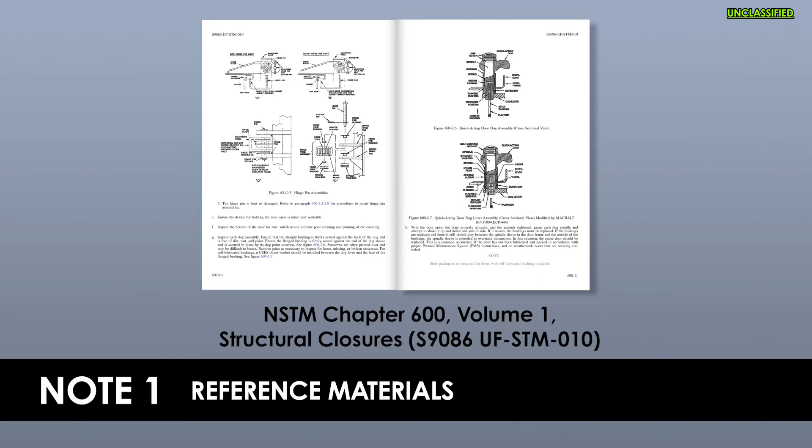S9086-UF-STM-010 contains detailed steps, illustrations, and procedures for accomplishing inspection and maintenance on watertight doors. It shall be used in conjunction with this MRC. Warning signs can be manufactured locally of engraved red-white plastic to provide information shown in Figure 1 shown on this MRC. Warning: exercise extreme caution when working around an open trunk.

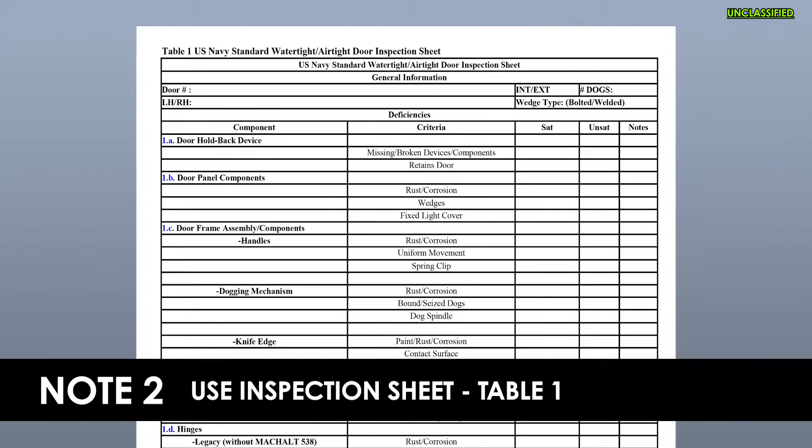Make inspection record sheet using Table 1 as a reference. Rope off and secure area around both sides of door with safety lines and hang warning signs. Verify proper installation operation of safety chains or guard ropes. Inspect for missing shackles, snap hooks, bolts or toggle pins with retaining lanyard, if applicable.

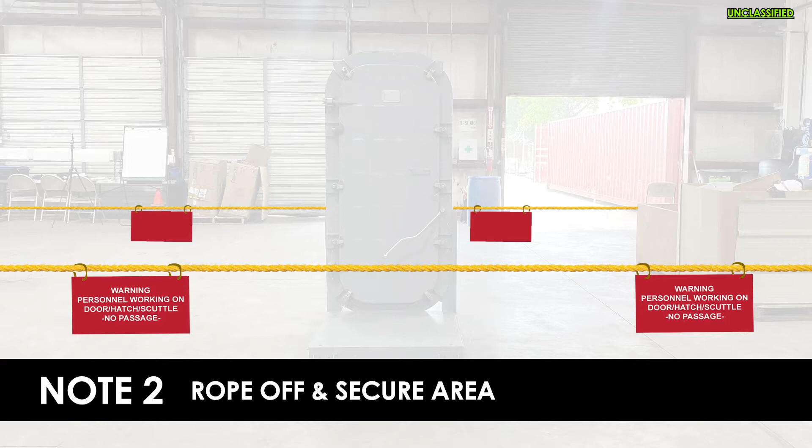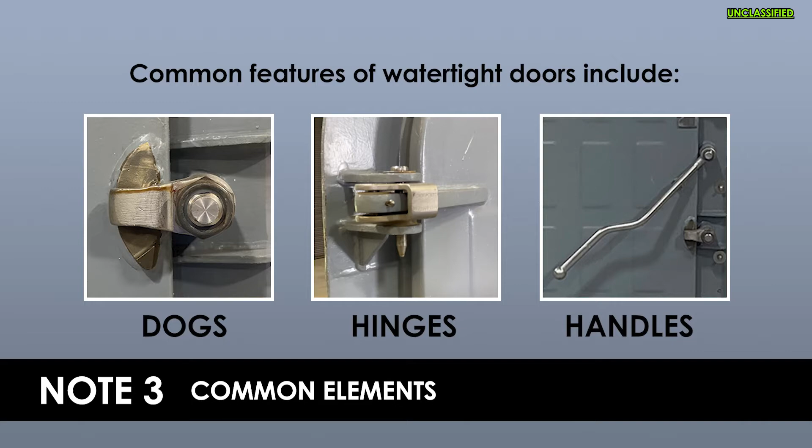Complete this maintenance requirement MR in its entirety prior to reporting discrepancies to Work Center Supervisor. Common features of watertight doors include dogs, hinges, handles. Use inspection record sheet to annotate all inspection results. Open door. Inspect door panel components. Verify no rust or corrosion on panel surface or components.

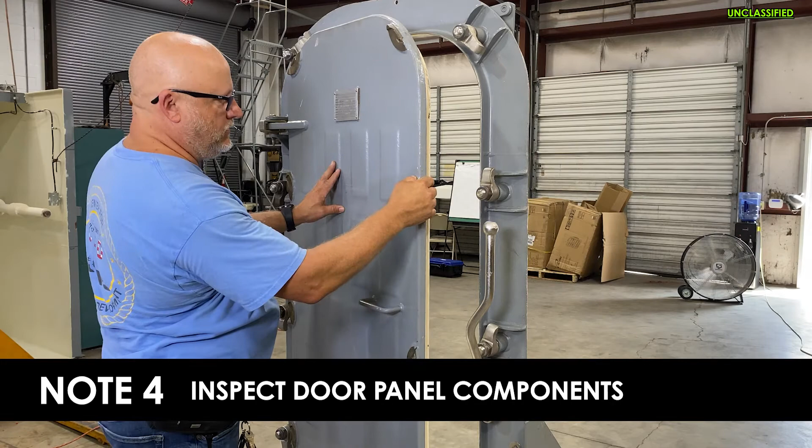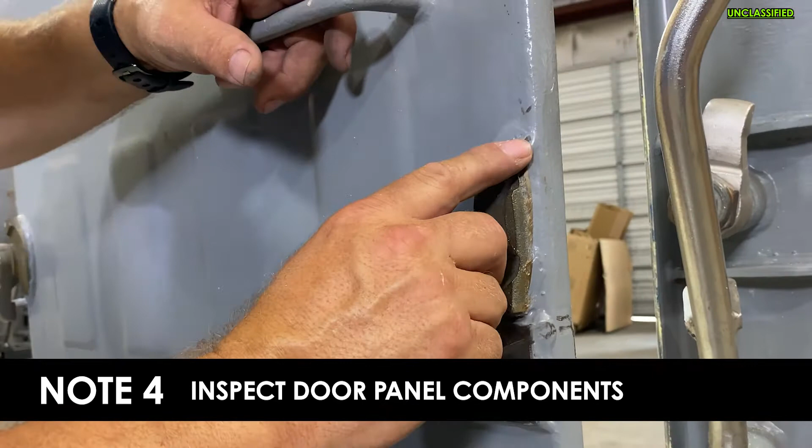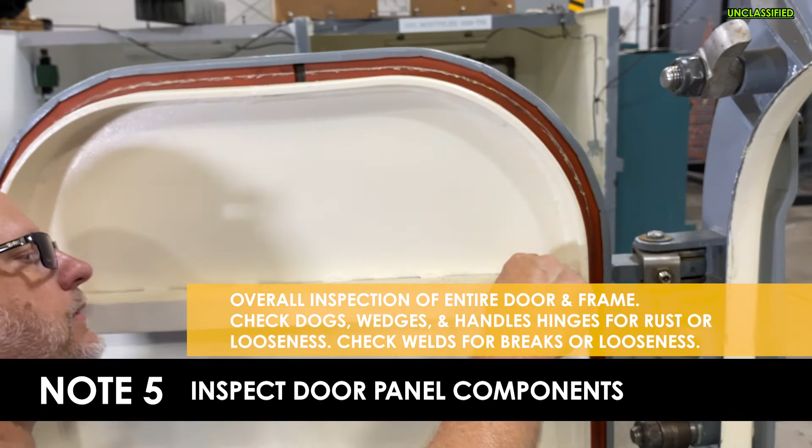Inspect welded mechanically fastened dog wedges for wear and gouges. Wear or gouges that exceed 1/8 inch in center of wedge, or leading edges that measure less than 1/16 inch, are unsatisfactory. Inspect door frame assembly components. Inspect overall door framework. Check dogs, wedges, handles, hinges for rust, looseness and corrosion. Also check all welds and connections for rust, looseness and corrosion.

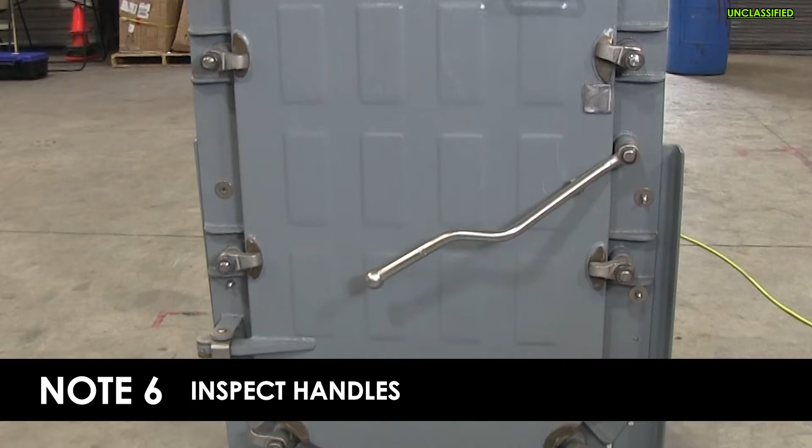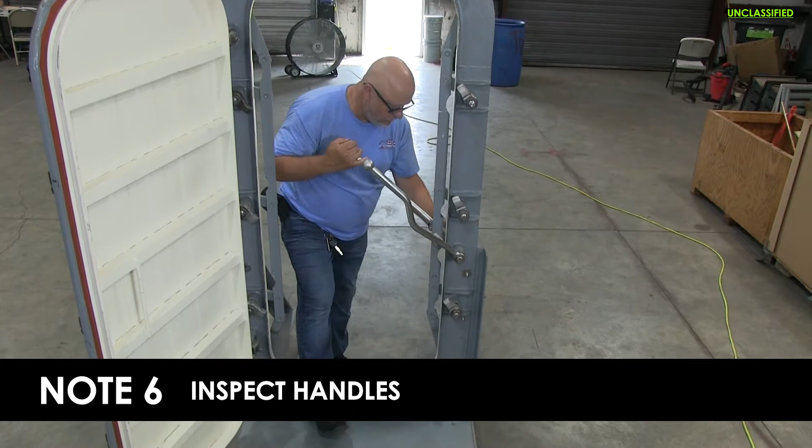Handles. Quick acting and individually dogged. Inspect handles for rust corrosion. Rusted corroded handles are unsatisfactory. Step 1C1B applies to quick-acting doors only. Operate handles. Verify internal and external handle move in unison for quick-acting doors only. Omit if not applicable. Failure of door handles to move in unison are unsatisfactory.

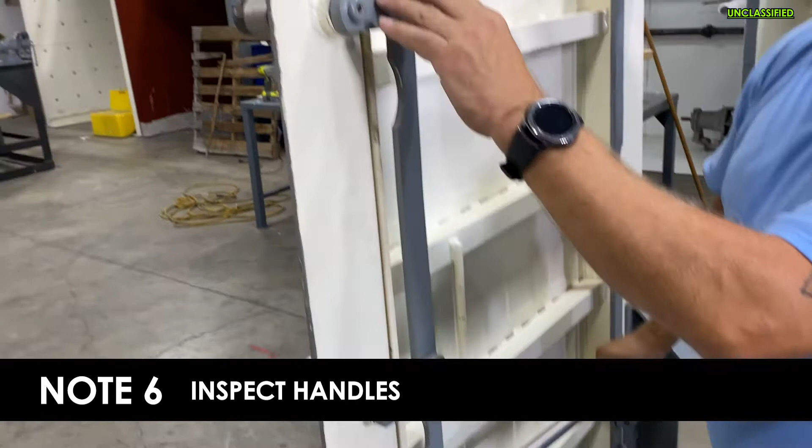Inspect handle spring clip assembly for broken or missing spring clip brackets, spring clips, or bolts. Broken or missing spring clip brackets, spring clips, or bolts are unsatisfactory. Engage handles into spring clip and verify spring clip holds handle firmly. Looseness of handle in spring clip is unsatisfactory.

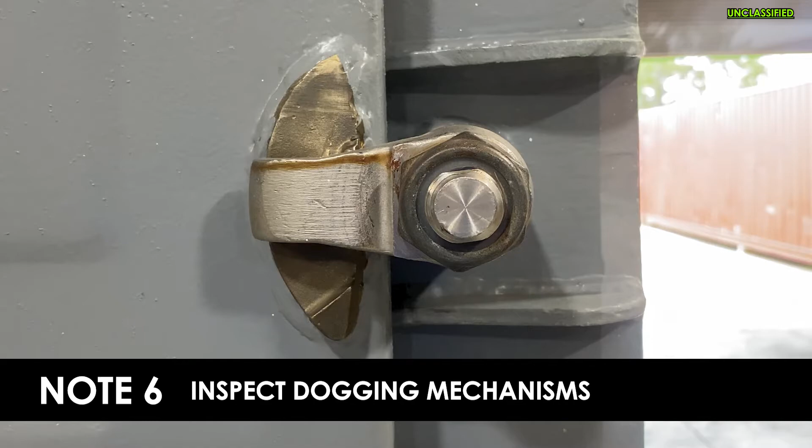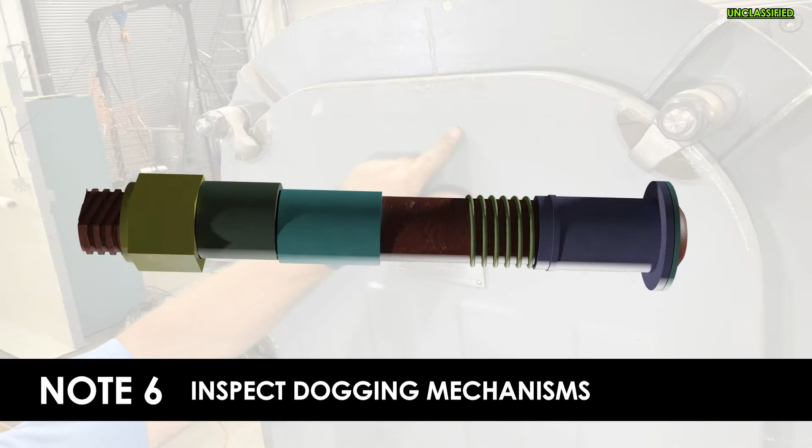Dogging mechanisms. Quick acting and individually dogged. Verify no rust or corrosion on dogs or dogging mechanisms. Inspect dog spindle set screws. Missing set screws, or set screws not flush recessed with surface of spindle sleeve are unsatisfactory. Inspect dog spindle self-locking nuts jam nuts. Missing or loose self-locking nuts jam nuts are unsatisfactory.

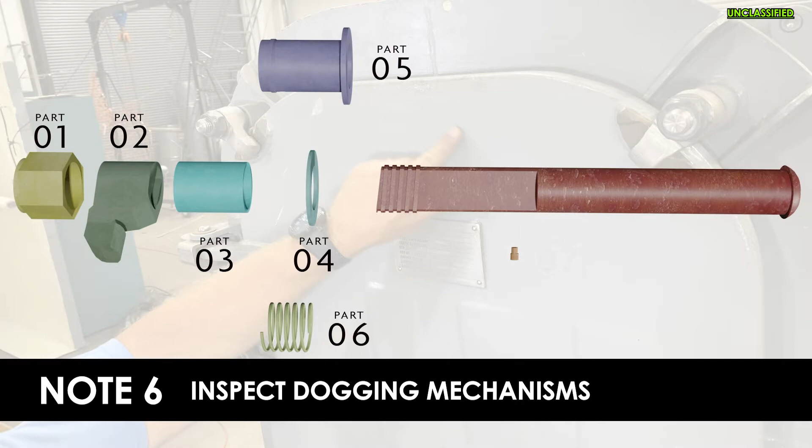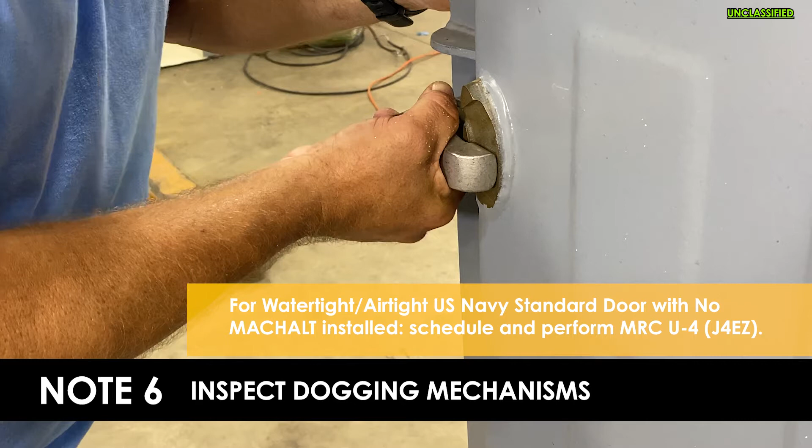Push on face of dogs. Binding or no movement of dogs is unsatisfactory. If unsatisfactory: for watertight airtight with no MACHALT installed, schedule and perform MRC U 4J4EZ. For watertight airtight doors with MACHALT 167-31010-526 installed, schedule and perform MRC U 5J4FA. For all other configurations, notify Work Center Supervisor upon completion of MRC in accordance with Step 1J.

Inspect for worn dog spindle bushings and operating handle spindle bushings. Grasp each spindle and attempt to shake it up and down and side to side. If movement occurs, then bushings or sleeves are worn and considered unsatisfactory.

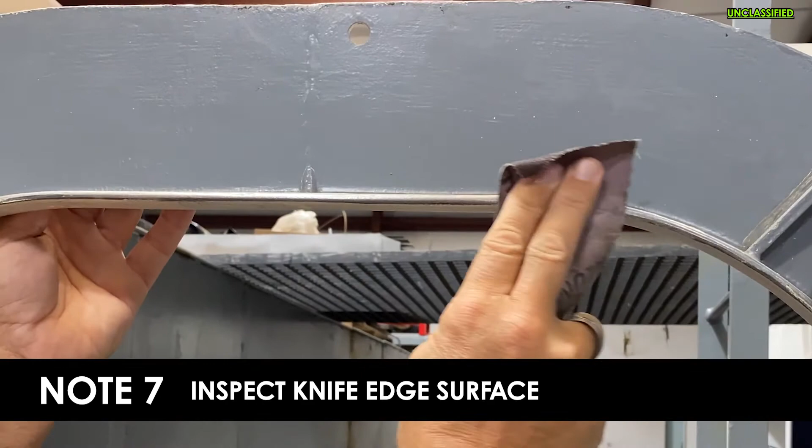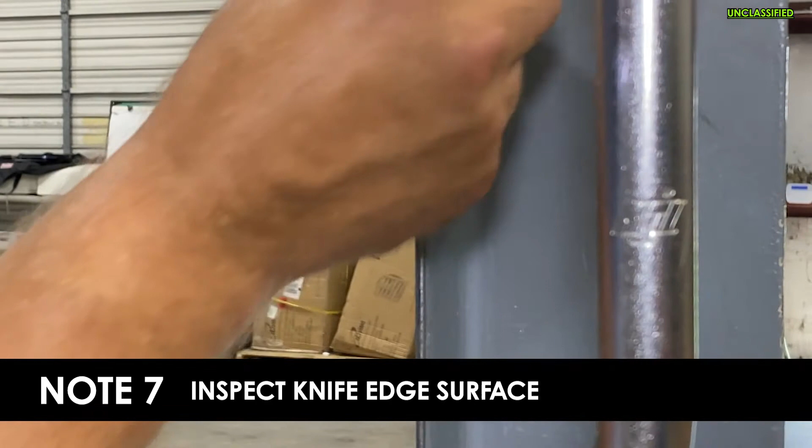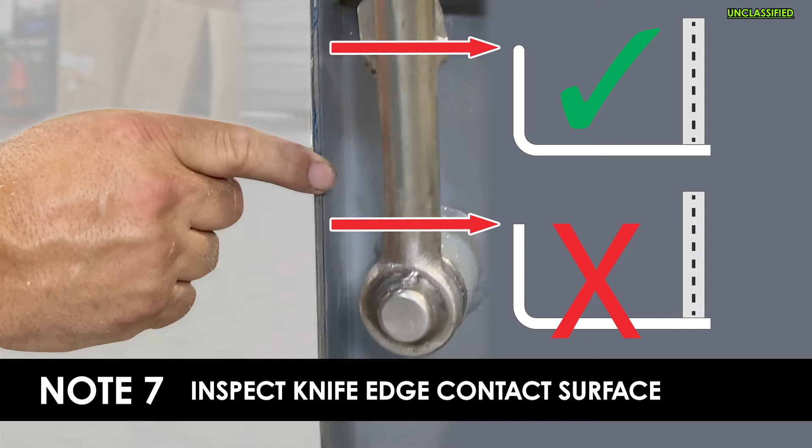Knife edge. For removal of paint from knife edge surface, utilize cloth, abrasive, 320 grit, SPMIG item 03176. Verify no paint on knife edge contact surface and/or no rust or corrosion on knife edge and knife edge contact surface. Inspect knife edge contact surface for roundness. A flat knife edge contact surface is unsatisfactory. Inspect knife edge for nicks and gouges. Nicks or gouges in excess of 1/16 inch are unsatisfactory.

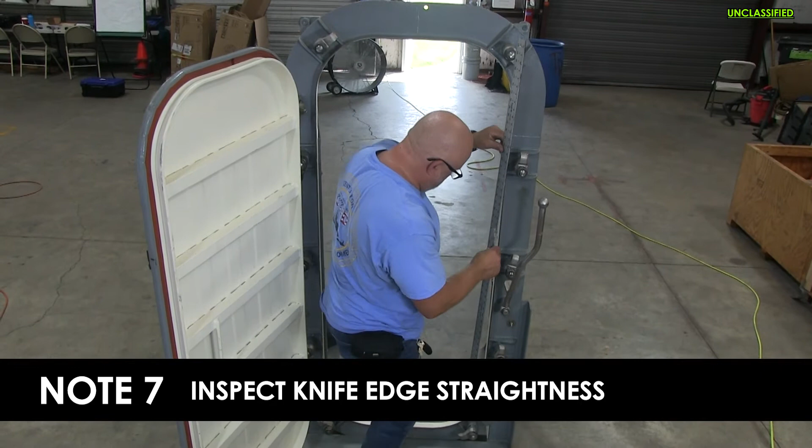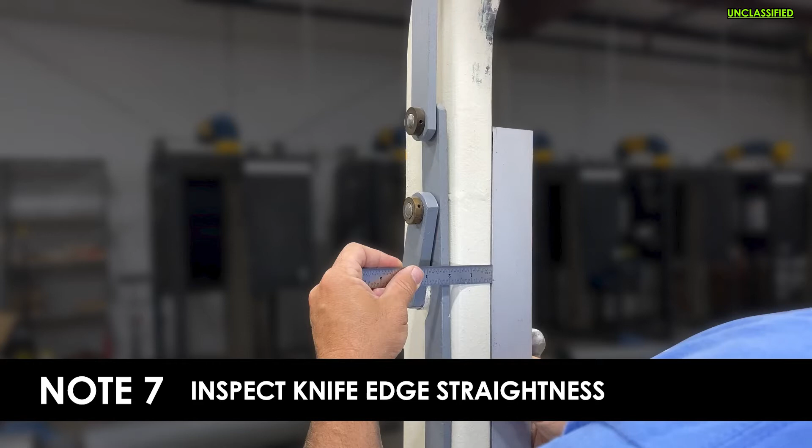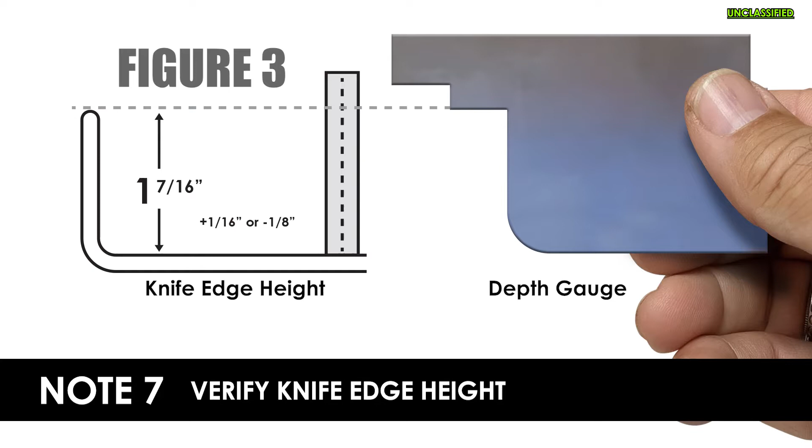Inspect knife edge for straightness as follows. Place a carpenter square parallel to knife edge face. Utilizing feeler gauge, measure gap between rule and knife edge. Gaps in excess of 0.0625, or 1/16 inch, are unsatisfactory. Repeat step for remaining knife edge surface. Verify knife edge height is 1 7/16 inch, plus 1/16 inch, or minus 1/8 inch, as applicable. See Figure 3 on MRC. Knife edge height not within tolerance is unsatisfactory.

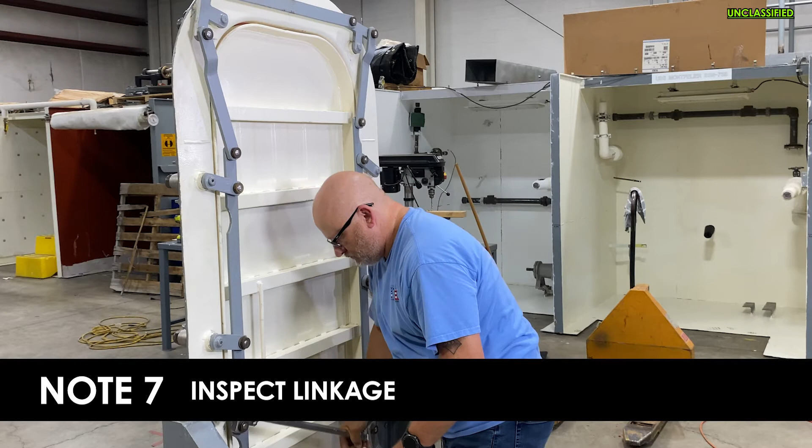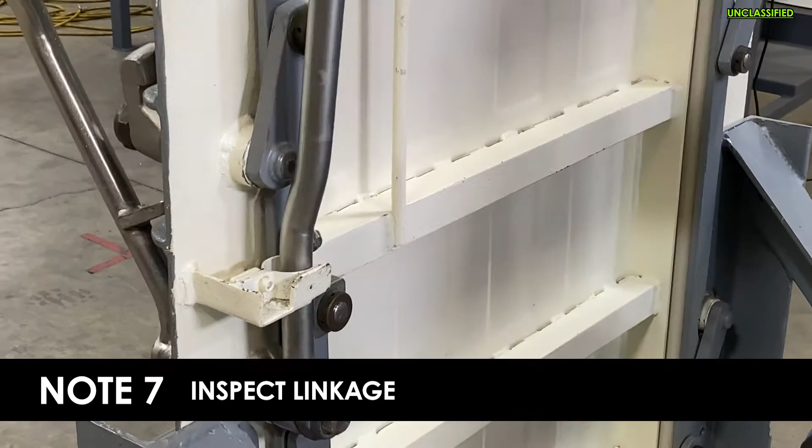Linkage for quick-acting doors only. Verify no paint or rust or corrosion on linkage. Inspect conrod lever or linkage for looseness by operating handle up and down to move dogging linkage. If looseness of dogging linkage is obvious, inspect conrod collars, thrust washers, linkage bushings, and cotter pins. Any missing components are unsatisfactory.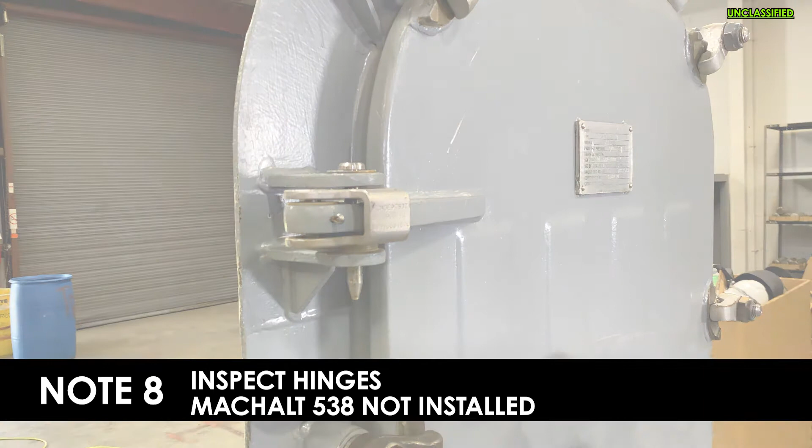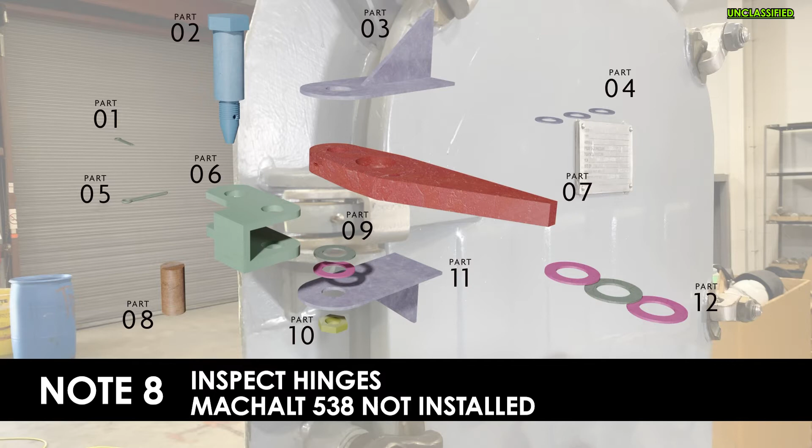Verify hinge yoke, yoke pin, hinge pin collar, hinge pin washer brass, hinge pin cotter pin, yoke pin washer brass, yoke pin cotter pin, adjustment set screw and hex nut. Any missing or unauthorized components are unsatisfactory.

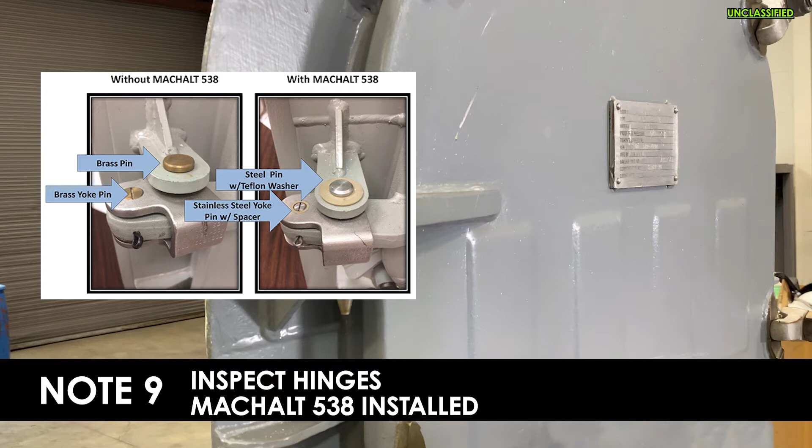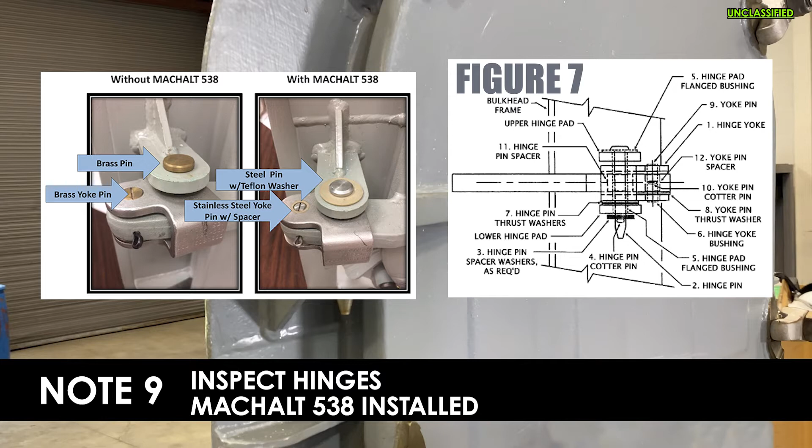Step 1D2 applies to doors with MACHALT 538 installed; omit if not applicable. See Figure 7 on this MRC. Verify hinge yoke, hinge pin spacer washers SST, hinge pin cotter pin, hinge pad flanged bushings, hinge yoke bushings, hinge pin thrust washers composite, yoke pin thrust washers composite, yoke pin cotter pin, hinge pin spacer nylon, and yoke pin spacer brass are installed. Any missing or unauthorized components are unsatisfactory.

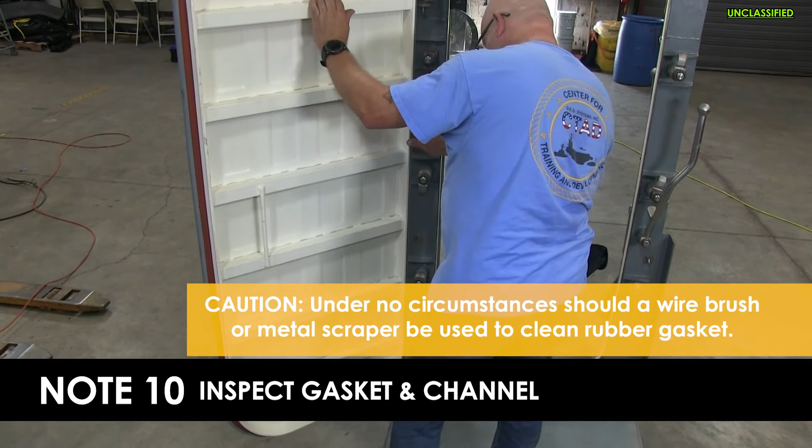Inspect gasket and gasket channel. If inspection criteria fails in these following steps, schedule MRC U7, J4FC to replace gasket. Caution: under no circumstances should a wire brush or metal scraper be used to clean rubber gasket. Clean all paint and corrosion from gasket by scraping with hardwood block.

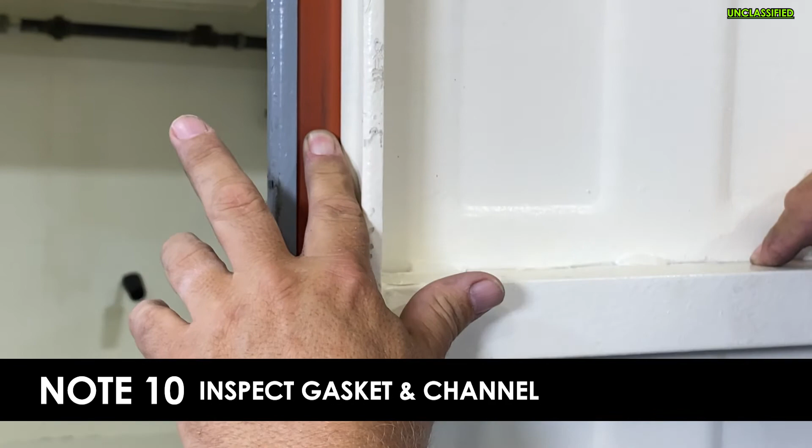Verify no paint on gasket. If paint is discovered, put on goggles. Remove paint from gasket using hardwood block. Remove goggles. Inspect visible portion of gasket channel for rust and/or corrosion. Inspect gasket for bulging. Inspect gasket for pliability and cracks. Hardened or cracked gasket material are unsatisfactory and gasket requires replacement.

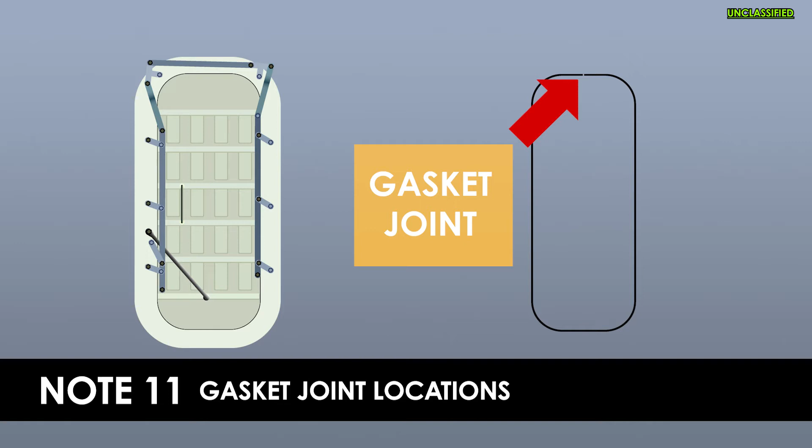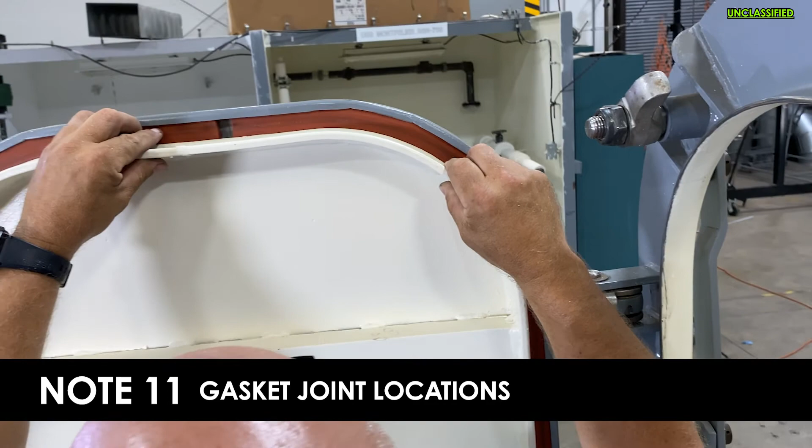For doors with 4 round corners, a single gasket joint should be located at top of door. For doors with 2 round and 2 square corners, gasket should be in 2 pieces with a 45-degree miter joint at both square corners. For doors with 4 square corners, gasket should be in 4 pieces with 45-degree miter joints at all 4 corners. Inspect gasket joint and gap. Gasket joint not at proper location or any joint gaps are unsatisfactory and gasket requires replacement.

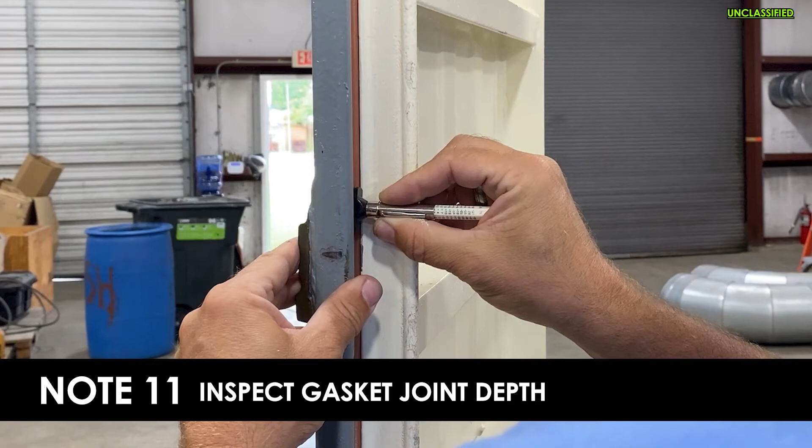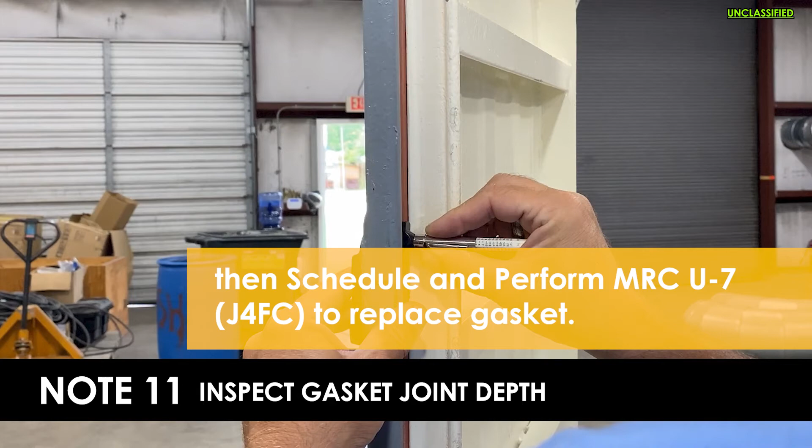Utilizing depth gauge, inspect gasket for permanent set groove. Permanent set groove in excess of 1/8 inch is unsatisfactory and gasket requires replacement. If inspection criteria failed in these steps, schedule and perform MRC U7, J4FC, to replace gasket. If inspection criteria fails, schedule MRC U6, J4FB, to adjust door.

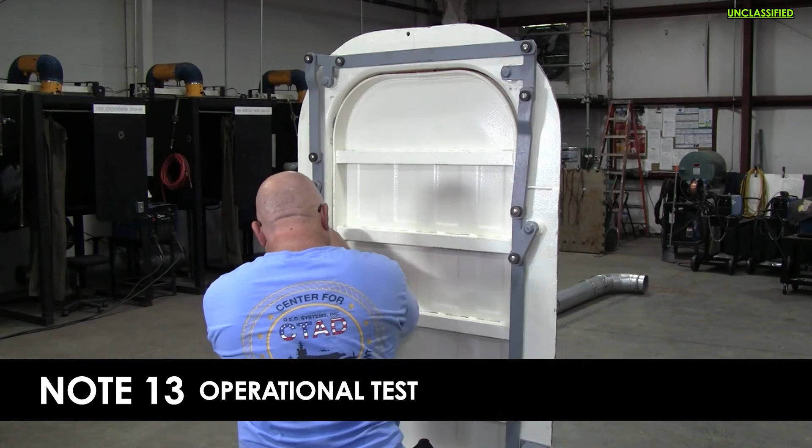Conduct operational test. This step applies to quick-acting doors only; omit if not applicable. Operate dog handle and inspect conrod linkage for binding, warping of conrod linkage, or rotation of conrod lever studs. Binding, warping of conrod linkage, or rotation of conrod lever or studs are unsatisfactory.

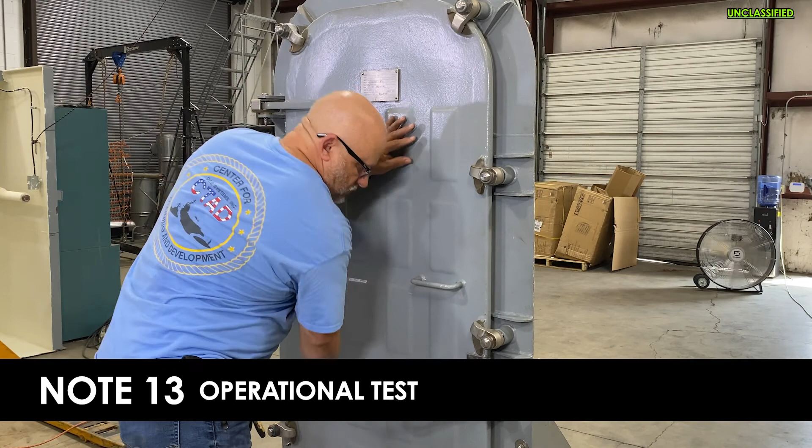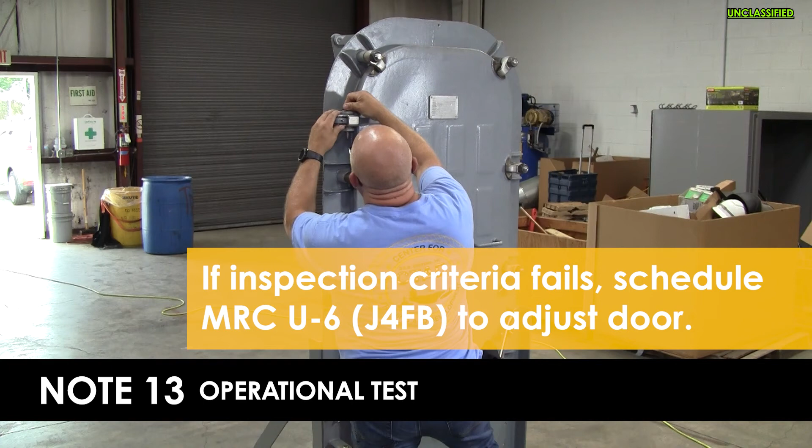Shut door and engage dogs. Inspect dogs for full engagement on wedges. Dogs not fully engaging wedges are unsatisfactory and door requires adjustment. Undog door and cycle door from open to shut 2 times. Binding of door, failure of dogs or operating handle to clear door frame are unsatisfactory and door requires adjustment. If inspection criteria failed in these steps, schedule and perform MRC U6 J4FB to adjust door. Conduct chalk test.

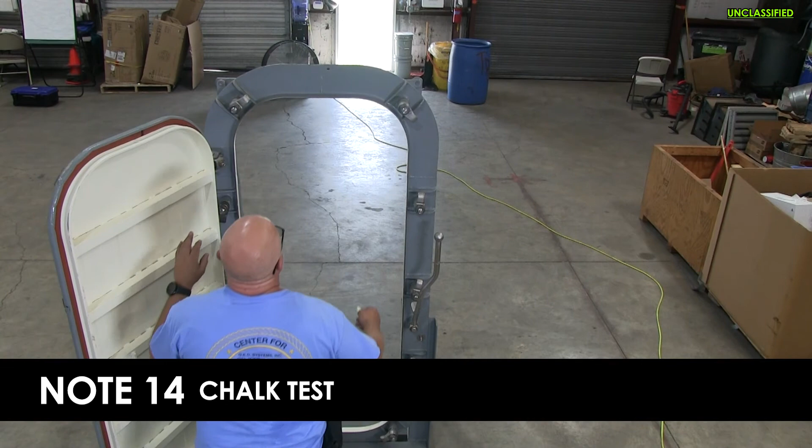If inspection criteria failed in Step 1G5, schedule and perform MRC U6 J4FB to adjust door. Clean knife edge and gasket with clean cleaning cloth. Apply chalk to knife edge. Shut door and dog. Undog, open door and engage holdback device if applicable.

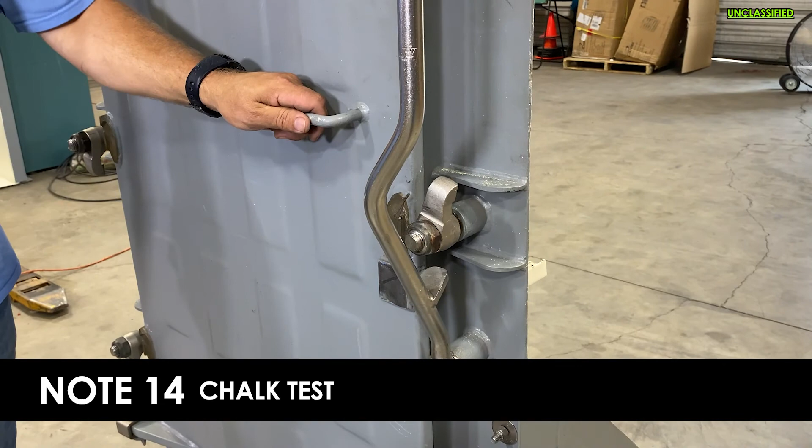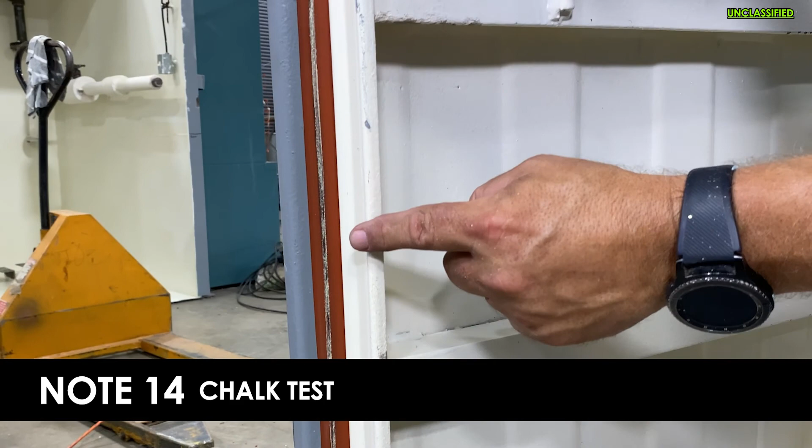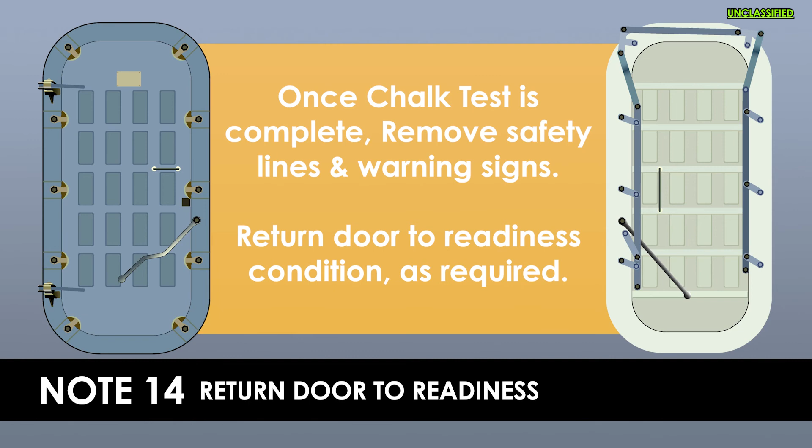Inspect for continuous chalk impression in approximate center of gasket. Non-continuous or offset chalk impression to either side of gasket are unsatisfactory; door requires adjustment. If inspection criteria failed in Step 1G5, schedule and perform MRC U6 J4FB to adjust door. Clean excess chalk from gasket and knife edge using clean cleaning cloth. Once chalk test is complete, remove safety lines and warning signs. Return door to readiness condition, as required.

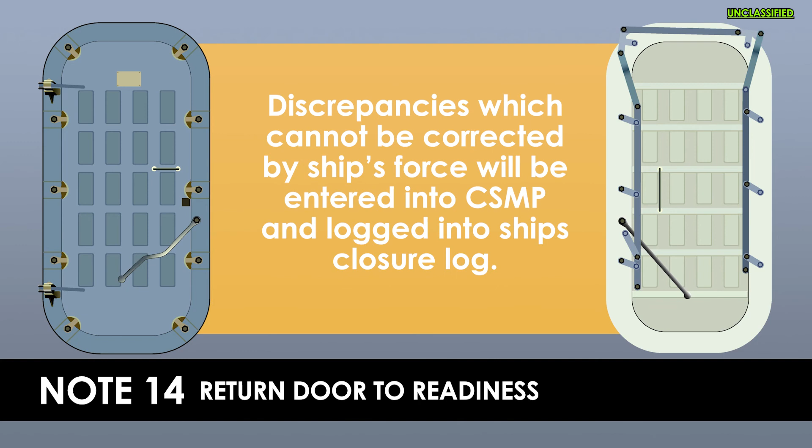Report inspection record sheet results to Work Center Supervisor for scheduling of corrective action. Discrepancies which cannot be corrected by ship's force will be entered into CSMP and logged into ship's closure log. Once discrepancies have been corrected or entered into CSMP and logged into ship's closure log, Work Center Supervisor may mark this inspection as complete. In this video you learned to inspect and test operate exterior U.S. Navy Standard Door Q51.